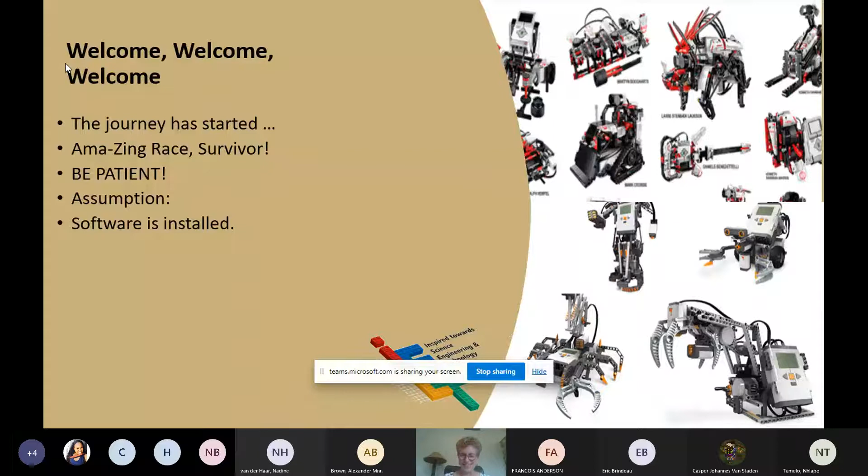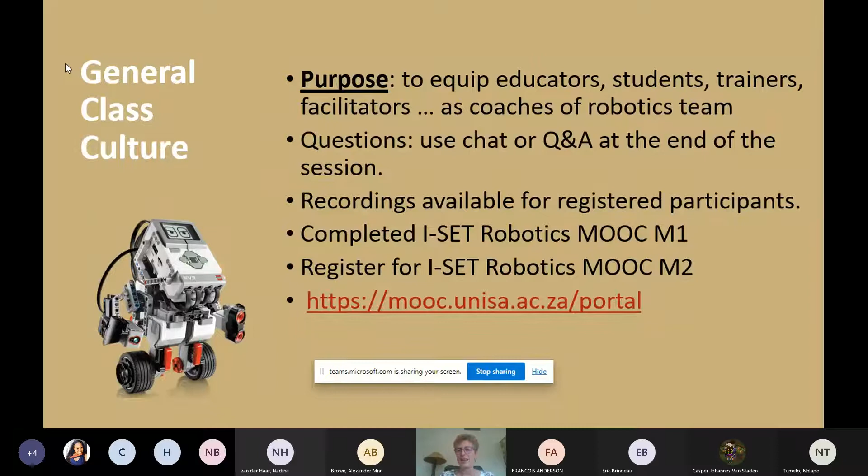M2. And of course, our whole class culture is really to equip our educators. If we want to have competent and confident teams of learners in robotics, we need to equip our educators or any coach. So whether you're an educator, a student, a trainer, facilitator, or just a visionary community leader, this is the place for you.

Okay, so what we're going to do today, and I encourage you to have pen and paper handy, let's just kind of unpack things. Because we're going to analyze problems, and this is not a session where you sit on a couch and pour out your heart. This is analyzing the problem ahead of you.

But this kind of problem, we do need to divide and conquer. We've got this huge problem in front of us, and then we divide it up into what we call increments. So normally you have, what are the programming increments? What are the building increments? How do we move? How do we improve? How do we combine? And then we test. So all things, always divide and conquer.

So this is my little plan of action. Not cast in concrete, but it does work. So if you have a problem, you analyze the problem. And usually it's good practice to go and see whether you can find any other information about it. Gather information, define the verbs.

So in robotics, your verb is your important thing. Your verb will tell you exactly what is required to do. Remember, your robot is going to do something, so you need to analyze the verbs. And the verb will give you an indication of the structure required.

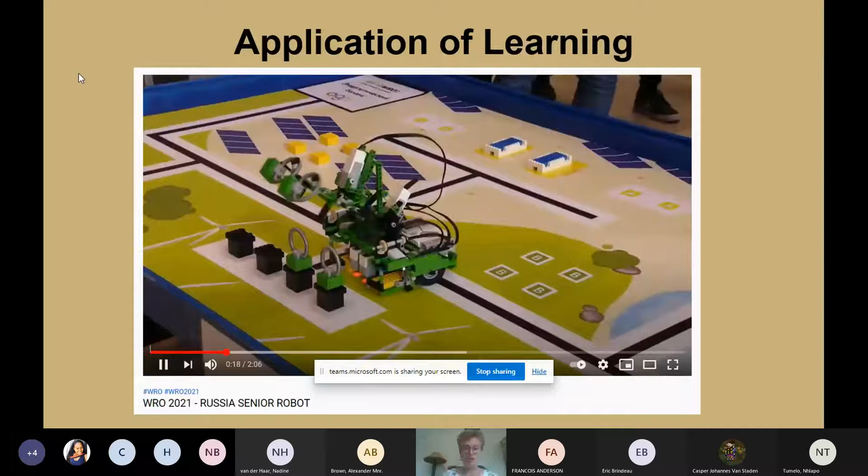You can do powered attachments, line follow, attach a sensor, build a powered attachment. So you can do all the requirements, it's just putting it in the correct order to do the correct missions. A lot of fun. The 2021 one was great.

Here's a really cool one. If I tell you what it has to do, you'll think you can't do it. The robot has to climb a pole, goes up the pole, and if you watch the video, it's got ping pong balls at the top of the tower. It's got to fetch the ping pong balls at the top, come down, follow the line between, and there's another tower in the same line.

So let's analyze it. What do we have to do? We've got a color sensor, and it's reading green and blue, and you can see the top is red. When it gets to red, it has to stop. That's a color sensor. What is the movement? The robot has to move up a tower. How's it going to move? Tires to hold on.

So if you look at a video and you think, I can't do this, analyze it rather. There's this whole collection of videos that you can do. Now I'm going to stop talking. Or maybe I'll do one more.

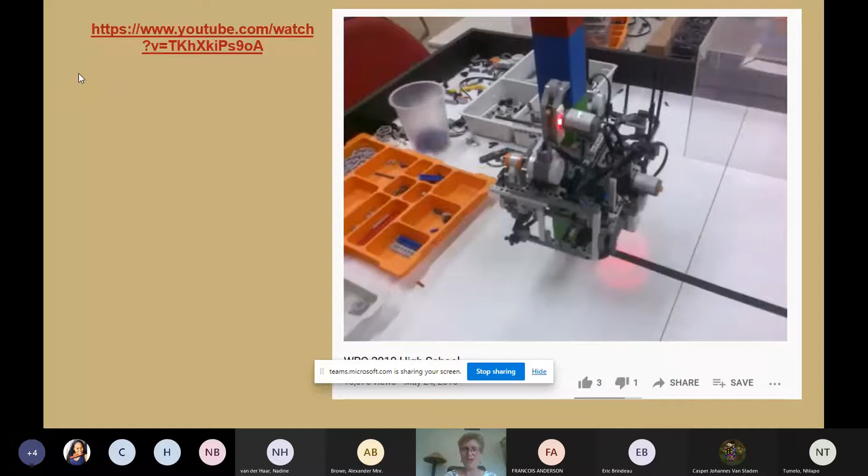This one was also a WRO challenge, but it had to turn. These were solar panels, see the little structures on the intersections? They are called solar panels. The ones made with black bricks are the ones that need to be replaced. The red and the blue, that was correct. If it was the other way around, it needed to be turned.

Straightforward: you've got a color sensor watching for the intersections. The collect structure, or the structure to pick it up, you can see it's at the back there. So it travels over the solar panel, and picks it up from the back. It picks it up, turns it, and puts it down again. Nothing that you cannot do. It might take a little bit of work, but you've got it.

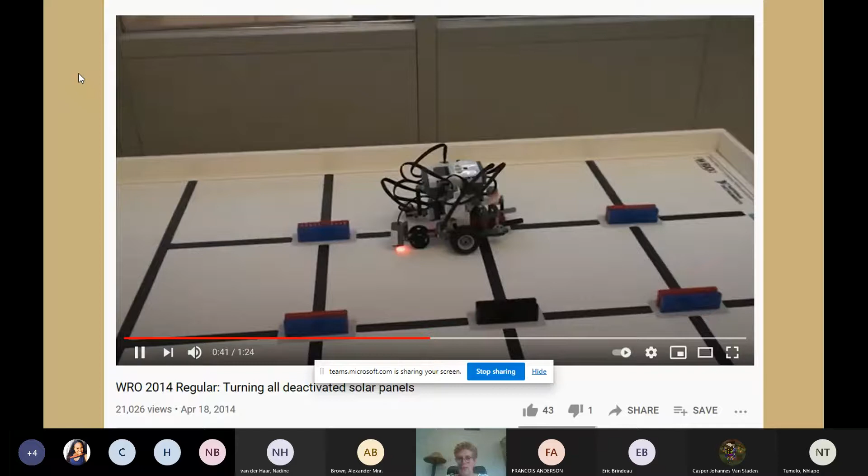This is one of those really cool things. The video is also quite cool, because the only brief they had was the robot had to climb 4 or 5 stairs, that's all. But the stairs are getting double the height. And it's got that little ping pong ball was supposedly to be an egg, but we had too much egg smushing, so we just kept it as a ping pong ball. It's got to go all the way to the top, and all the way down to the bottom.

So if you were to think about it, it's got to go up, it's got to be long. But look at all the teams that came with a solution, not one solution was the same. Not one. Every team had their own interpretation. There was one team, low risk team, they only did 3 stairs, but they got points, you see.

And so there is this trade-off when you have a solution, to say this is what we are going to work with, we are not going to go further. They had color sensors, they had a powered attachment, they had decisions, they made a decision for the robot as well: we're going to only go up 3 stairs, and then we're going to stop. Okay, now I'm not talking anymore.

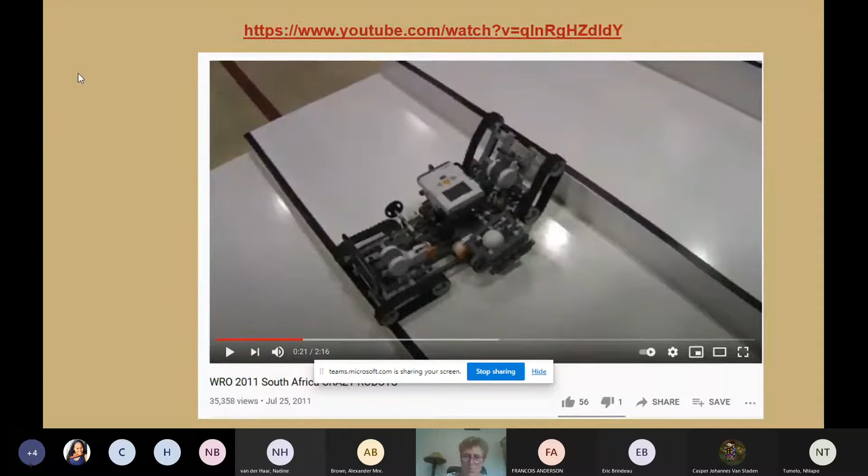No answers yet. No answers. We need a poll for this. We should have had a poll. You were reading my mind. I was about to do it. What's the question?

Anyone? Is there nobody, Tumelo? There's no one yet. I'll answer the easy one and then you can answer the next one. Okay, Casper, do you want to answer it? There's a hand. Oh good, thanks Nadine, thanks Nadine. All right, who's got the hand up?

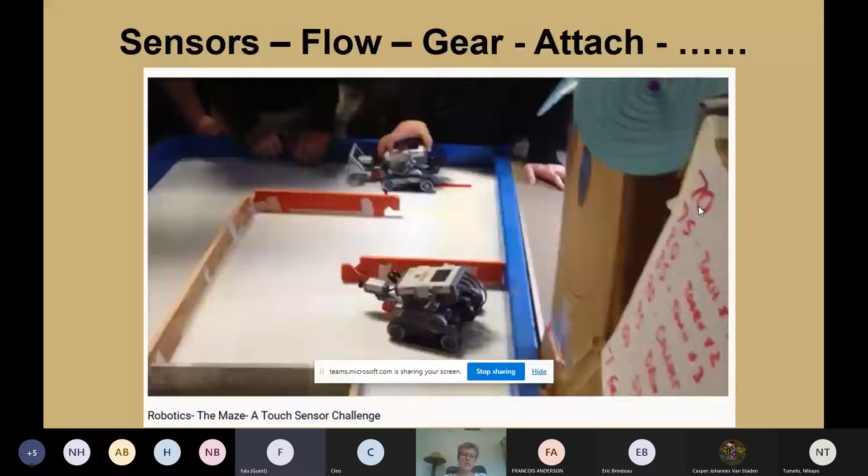Okay, so the next one is this one. It's again a maze. The blue lines are just there to guide you, but the secret is the color blocks. Anybody want to guess how to follow this?

Is there any hand up, Tumelo? No hand yet. No?

Okay, so I'll give you a clue. If you go forward and you see yellow, you must turn to the left. If you go forward and you see red, you must turn to the right. So this is also, you can put any colors down, but you can basically guide your robot.

Just moving from one color block to the other. All right, I see Michelle says you can use a color sensor. There we go. Thank you, Michelle. Thank you very much. Yes, indeed.

Very much so, you can use a color sensor. You go forward, and depending on what color you're reading, your flow will then be a loop to say, move until you see one of the following colors. If you see yellow, then you do this. If you see red, you do that. If you see green, you do the other thing.

All right, it's an if and else, a good if and else statement. Yes, very much so. You have to know when if and else is, yes, or case statement. Absolutely. But for gears and attachments, you don't need to use attachments for this.

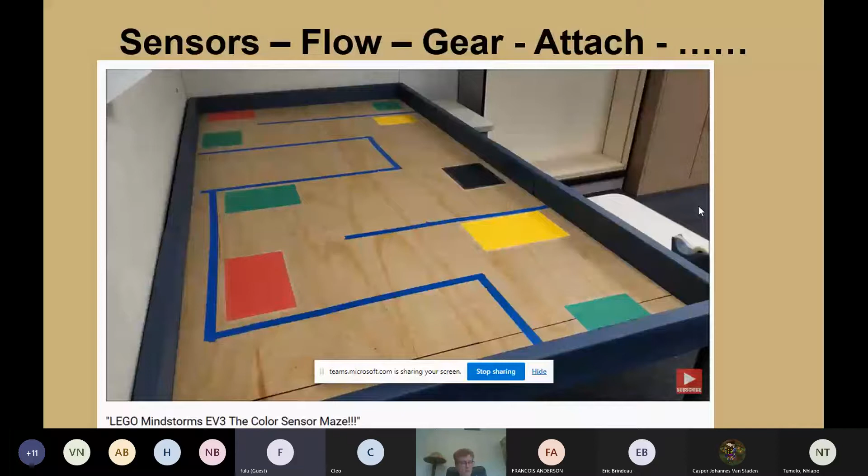All right, let's see what the next problem we have to solve. Oh, okay, so this is a line follow. So you either need to put down white tape on a dark surface or black tape on a lighter surface because you need to follow the line.

Anybody want to hazard a guess? How many sensors do we need for this robot? So what the robot has to do is as soon as it comes to that box, it has to stop and go around that box and then find the line again. Anybody?

Yeah, I almost wanted to say I think 2. Or Nishan said, okay. Sorry, Alexander, you just said, we'll use a forever loop or only a set amount?

Yeah, so this one you would probably use forever until it comes back, but there has to be an ending condition. So normally you would have like a red line or a blue line over the white line to say when you see red, that's when you can stop. If you are seeing that there's an obstacle in the course, then you will need to have an ultrasonic. You see, now we've already got 2 sensors: an ultrasonic facing forward and a color sensor facing down.

The other thing is if you go around here, this is kind of the straight, this is your highway. If you go there, that's easy, that's an easy line follow. The not so easy line follow is this. So you would need to time how long you are in the bends and go nice and slowly, and then once you're out the bends. Everybody okay with that?

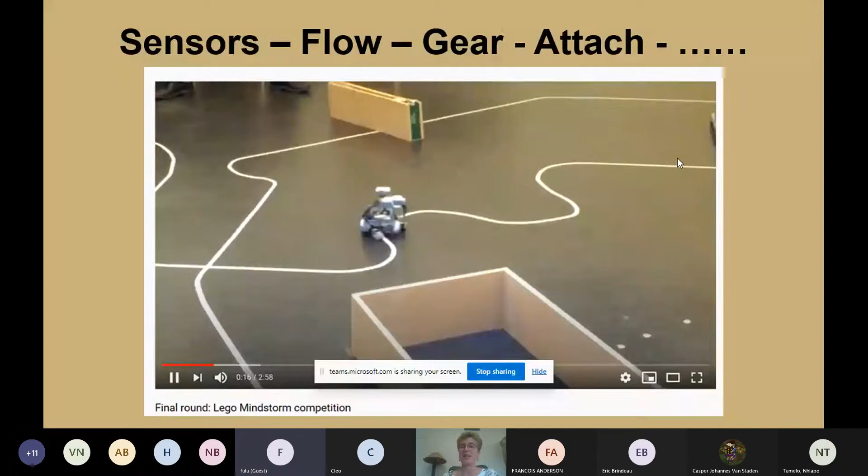Okay, so just FYI for that. All right, okay, this picture's not too great, but it's a forklift.

Okay, so what I really want to show you, there's no sensors, except that I would have put an ultrasonic at the end of it, so that the forklift knows when it's picked up something. It's not very clear on this picture whether there's actually an ultrasonic there.

And then definitely gearing for strength. The attachment is definitely powered because it's got to lift it up. The gearing is the strength part. When you do forklifting, you don't need speed, you need strength.

An important thing to know is, why would you turn the brain and the motors that way? That's about balance and center of gravity. Remember, if you're picking up a weight, you want to have as much straight down force of gravity so your robot can actually pick something up.

So this is not going to tip. And look at the wheels, they're close to each other, so it's greater stability.

A forklift is one of those powered attachments, not often used sadly, but it's got a lot of modification potential. You can use a whole lot of things, making longer and shorter fork parts onto the forklift. But if your team knows how to build a forklift, much better, kudos to them.

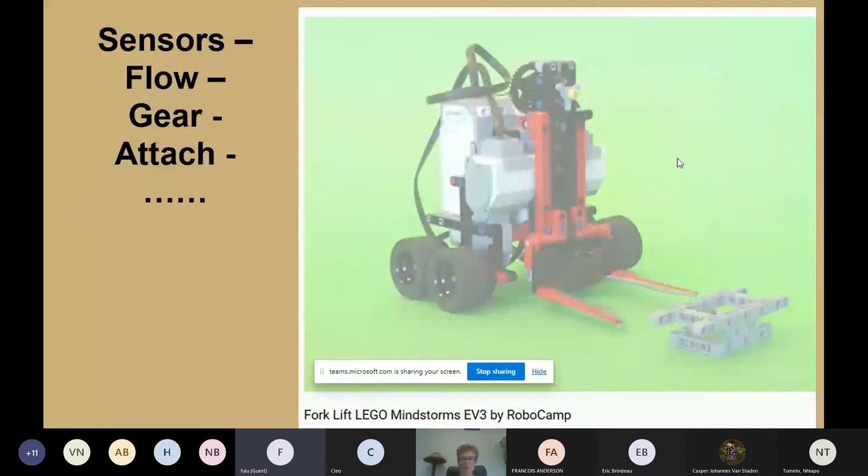All right, let's have a look at the next one. Oh, this is my favorite, my all-time favorite. This is your mechanism, your claw. So this is a powered attachment.

I kept the whole page because here's one as well, which is large attachments versus simple attachments. I need you to look at that as well. So this is a claw and lift mechanism, it puts it together and lifts it up at the same time.

So it comes up and holds it together and then pulls it together. So it's a single mechanism that can do two things, a multi-purpose mechanism that is required.

I really recommend you watch this large attachments versus simple attachments. There was a time, around 2015, 2016, where teams had super large attachments, to the point that they had a tiny little robot and these huge attachments. Now that is all very fine and well if your large attachment works. So I'm now pleading with you, make compact, simple attachments that work.

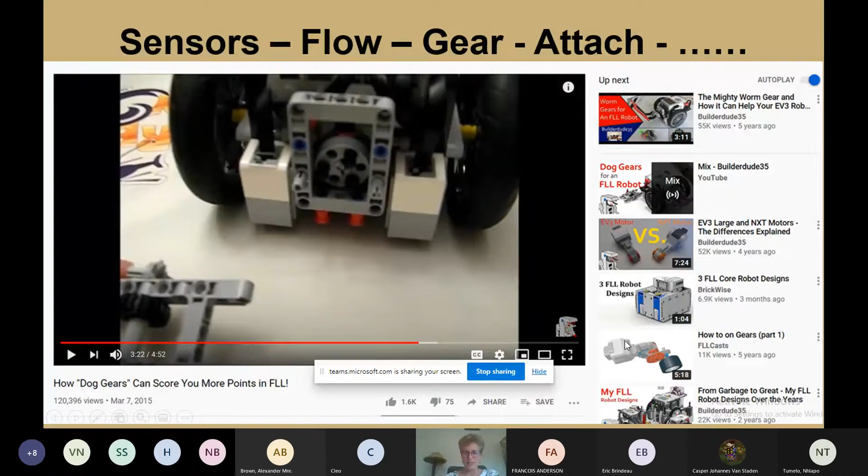So that's my dog gears thing that I've explained to you. And there we go. So this is a really cool exercise that you can do with your learners.

Show them the videos, run the whole video and say, okay, so where do you see the sensors? What is the flow? Is there any decisions? Are there any repetitions? Do you think there's any gearing? Do you think there's any attachments? So each one of these things can come into play. Let the teams analyze it.

I'm going to stop here. Tumelo, are there any questions? So far, no questions yet. No questions. Any comments in the chat? No comments yet. Oh, I see there's a hand that's raised - it's Brown Alexander. Over to you.

Dr. Gous, with that claw attachment now, how do you - that means that you have to know what the size of the object that you're going to pick up now. How do you not break a gear on that thing?

That comes with testing. It means you have to know the size of the object, so you can't build an attachment that will sort of pick up any size - you have to know what size the object is that it's going to pick up. So what my teams normally do is they look at everything - how many things do you have to pick up? And then you decide whether you can build one single attachment for all the missions, or do you need modification.

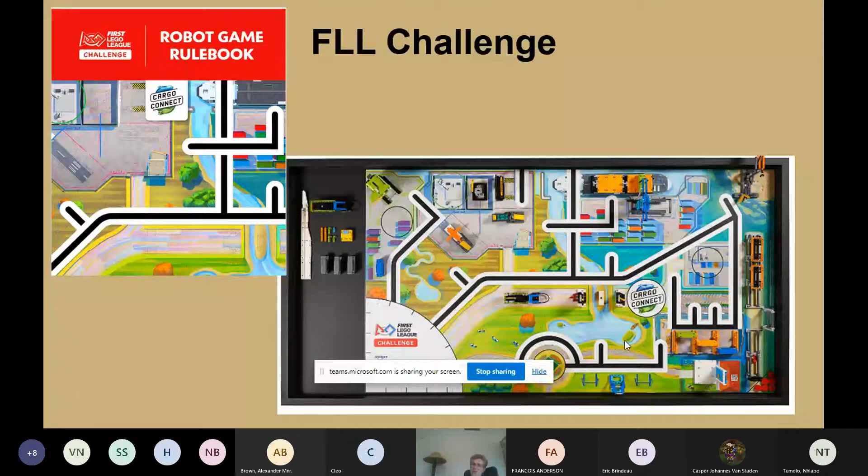So it has 16 different missions, all over this mat. There are lots of missions. Each mission has a verb. It's a good start, and you can combine them for greater efficiency.

You build these mission models using the bag numbers given in the book. They tell you exactly what to do. For example, to unload the cargo plane, you load the container in the plane and then push the cargo door all the way up to start.

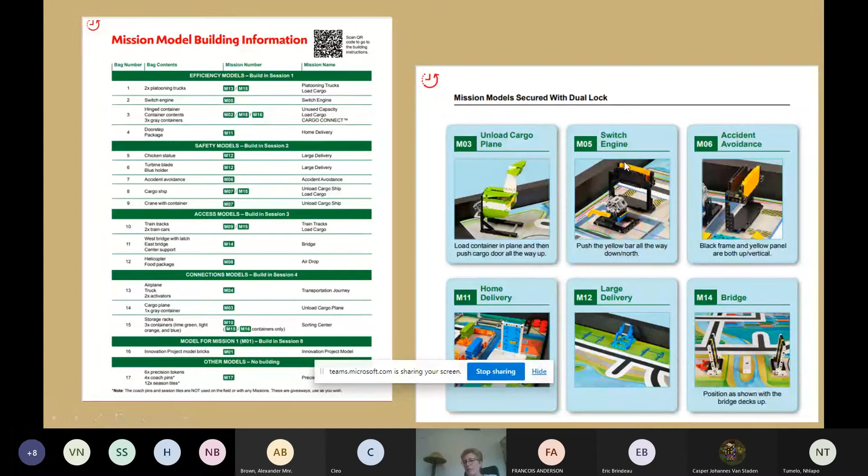So it explains it all very well, and dual lock, it's like double-sided Velcro, so it keeps your mission in place. I'm going to show you now on the board. It tells you exactly what you have to do, right up there in the corner.

So this is base, and your robot's got to go there. This distance is shorter than that distance. That is a long distance, so it's got to be worth its points. Your robot goes up like that, it's got a shorter distance.

If the cargo plane has been prepared for unloading and the door rests completely down, you get 20 points. But if it's unloaded and the container is separate, you get another 10 points. So it tells you exactly what your robot has to do.

Luckily it's got a robot path diagram, so you can scribble all over it. I usually use kokis and crayons, and we can plan it out. So if your robot goes here, then there, then there, then comes back to base and goes down here and goes back...

Your robot needs to have a strategy, right? And then you can estimate. So it's not just about getting out of the maze, this is about completing a whole lot of different missions, and you've got about 2.5 minutes. And then, of course, there's scoring.

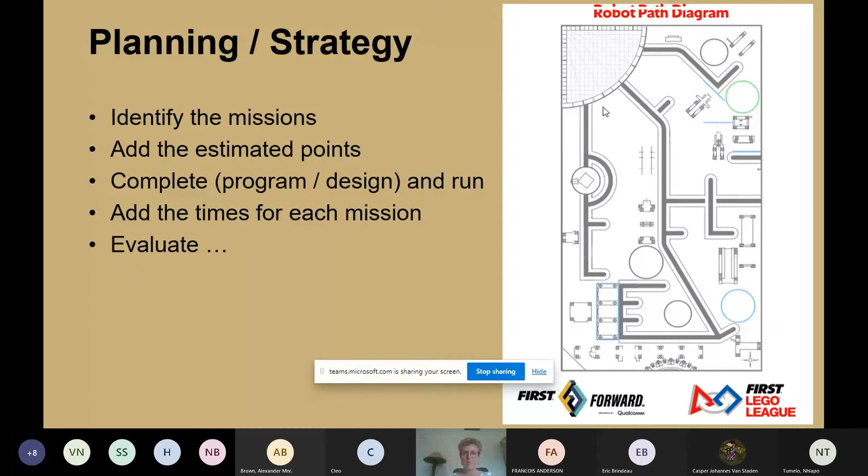So now it's not just about getting out of the maze. If you're going to do a competition, you've got to choose from all these missions, which ones are you going to do, and you get points for it in a single match. But your robot can come back to base at any time during the 2.5 minutes. So now, what I've got here are examples of how to tackle these missions.

This Dr. Hino has done all 16 Cargo Connect missions with a robot educator, but not within the 2.5 minutes, so you have to choose which ones you like. I know there are some teams using the gyro, and there's a link there for you.

But now the problem comes: you show your teams how experienced teams can get 680 points, and that's not actually contributing to the learning, because your teams say, oh, we can't do this. So I need you to look at both videos, but what I want you to do is say, what of these missions can we use? What are we aiming for? To get 680 points, you've got to be a phenomenal team, but watch the video because it gives you some ideas of where we're going.

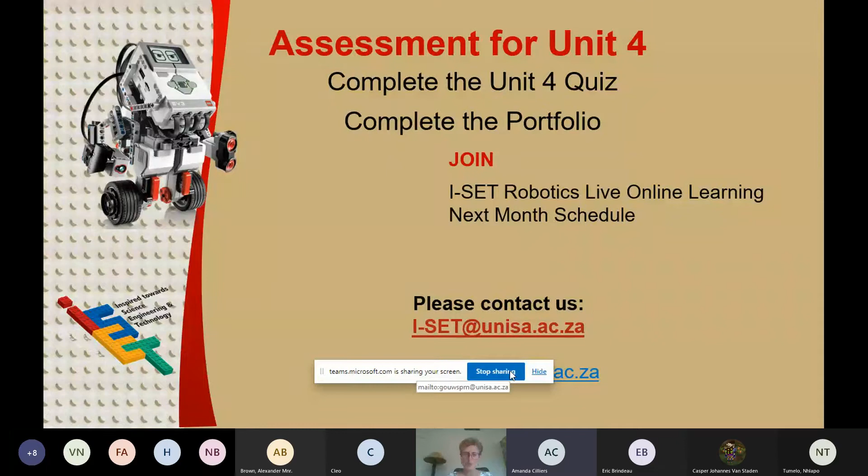Are there any questions? Any other questions that I've missed before I carry on with the robot? Yes. Let me just have a look here. Where is everybody? Okay, so now I'm back here, whose hands are up? No hands are up. Okay, any questions?

Okay, let's take one challenge.

Now to solve that problem, you need an attachment. To move the chicken requires another attachment. So now you've got two attachments on your robot. You've got to go out, do something, come back, do another mission, and come back.

I'm going to quickly change my camera and just show you. Now I've got a cat walking over here as well. Sorry, cat.

I'm just going to get this camera. This is very weird. Okay, so here is the base where your robot has to start. I actually think maybe we need to have another session so I can have a better camera. How's that?

Yeah, this is not working here. The sunlight is not on my side. Tumelo, we need to get this other camera sorted out. Okay, let me just quickly take my face back again.

What I want to really stress is we did a single sensor on Monday and Tuesday. The problems I presented, those six examples, used a single attachment or a single sensor. With following the line, you had a color sensor and an ultrasonic sensor.

In pulling it all together, this cat is not letting me go. What you need to now do is build a robot that has multiple sensors, multiple attachments, and a strategy. Whenever you have a problem, you need a problem-solving strategy.

That's when I said right in the beginning that we divide up the problem. For a robotics challenge, we take the whole challenge, divide it into missions, and each mission we divide up further until we get a whole solution. I really encourage you to go watch videos of teams that score high points, and see how they do it. It's about putting it all together.